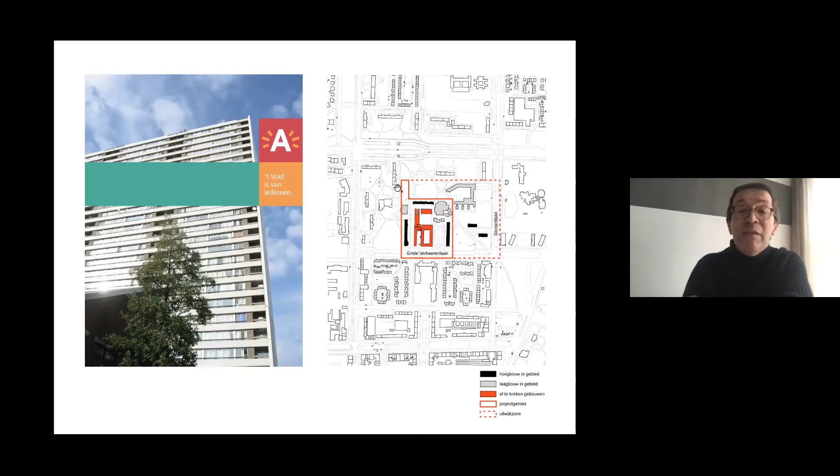And years later, in 2006, an open competition, an open oproep by the Vlaams Bouwmeester, was launched. They asked for teams of urban designers joined with architects.

Technum, and Bart van Gassen, the urban designer we worked with, judged that since much of the brief was in architectural terms, with very detailed specific briefs for buildings and programs, it would be necessary to make this urban design together with a few architects, enough to cope with all of the buildings that were needed. So we teamed up with Technum, and with de Vylder Vinck Taillieu and Tom Thijs architecten. We have fond memories of that collaboration.

What I will show in the presentation is the joint work that we did, the statements we made on the level of urban design, and then the three buildings we designed ourselves. But the work of our friends and partners will every now and then appear in the photographs.

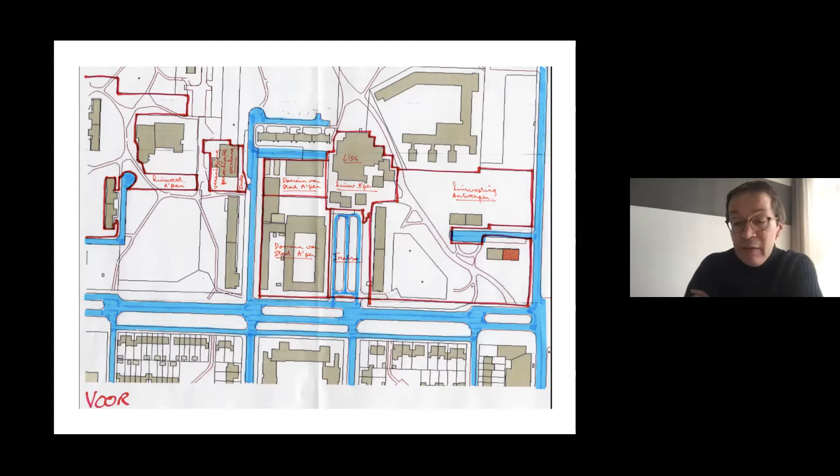So what we then thought was that the most important thing was to set the grid right, since the alignments were about the grid. We had to strengthen the grid and organize the additional buildings we had to design for, arranging them to this grid.

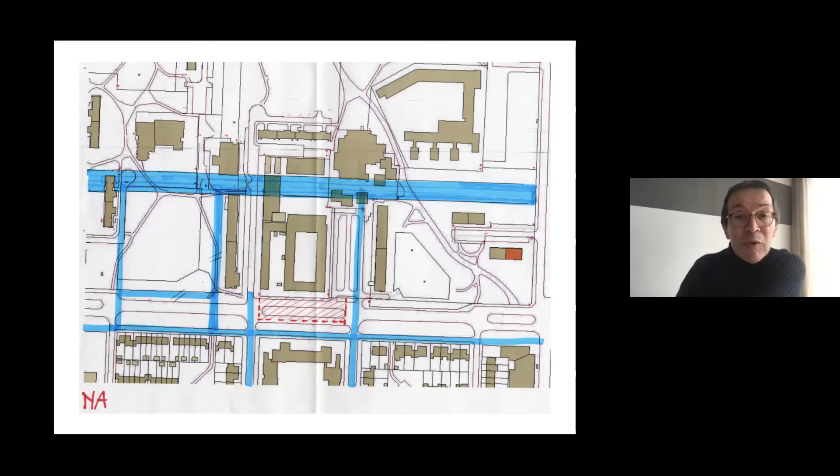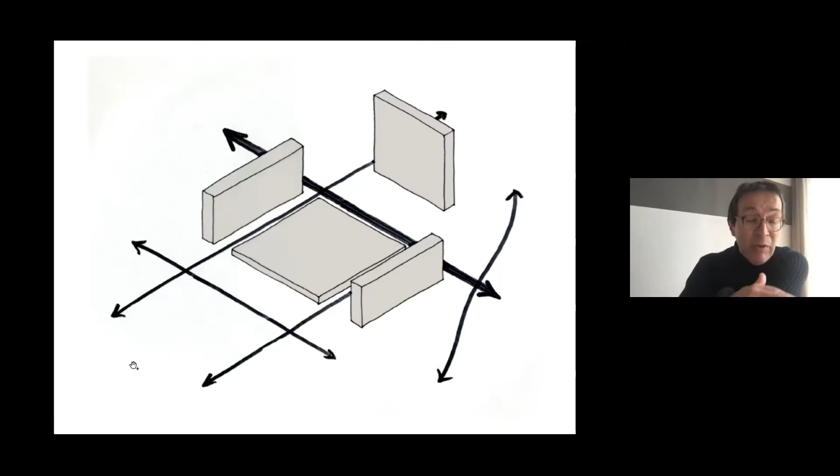So, a study drawing over here. This was very much the first idea. Instead of emphasizing the street that separates the low-rise from the high-rise, we thought that the emphasis should be more to the north, in between the three high-rise slabs, and that this would be the center of the plan, rather than the division between both of them, which then made it possible for the low-rise to cross the street and slide into the high-rise chamber.

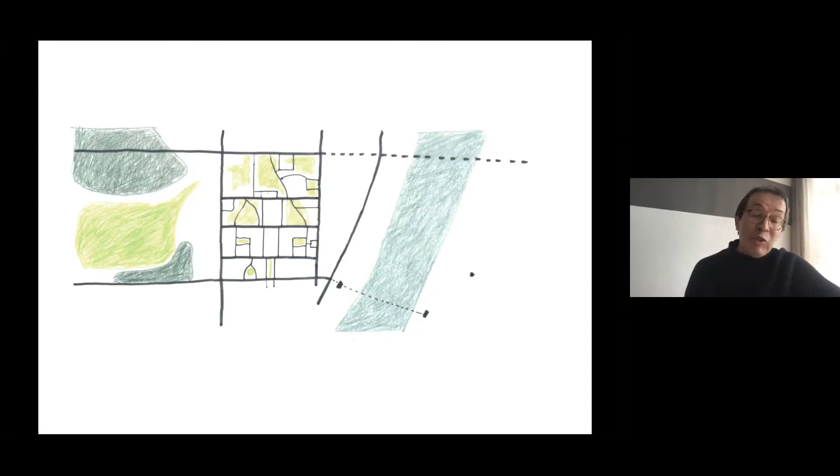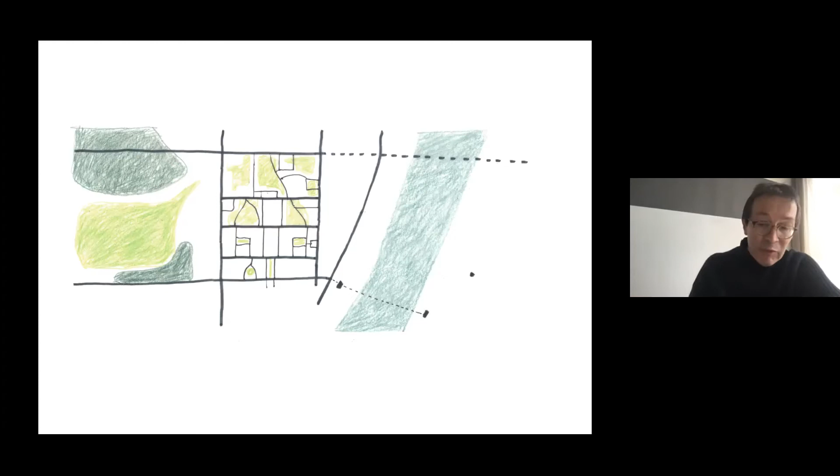So this is the new street that we integrated, and I think we could strengthen the overall design of this part of the left bank, which was actually a large-scale grid that could accommodate very different sorts of urban fabric, urban tissue. By doing this, we could make sure that the high-rise area and the other areas adjacent to it would evolve into an organic whole, one neighborhood, much more than segregated places where you would never dare go from one side of the street to the other, where these high-rise towers were, and where it was assumed different sorts of people would live. So this is the result of that operation.

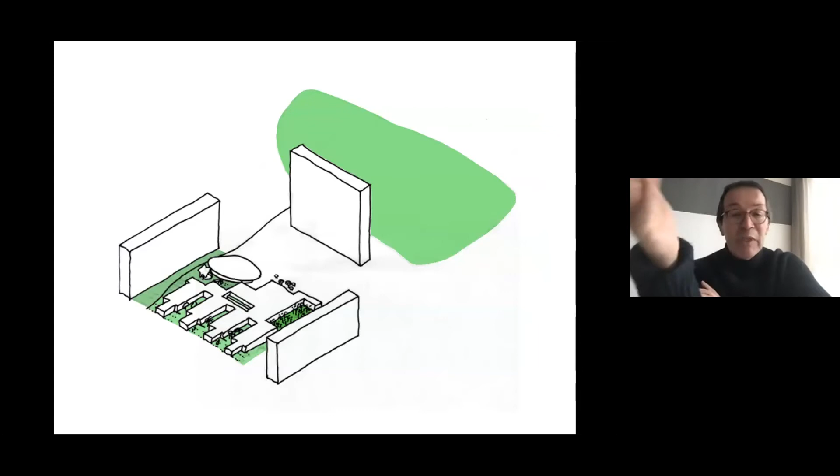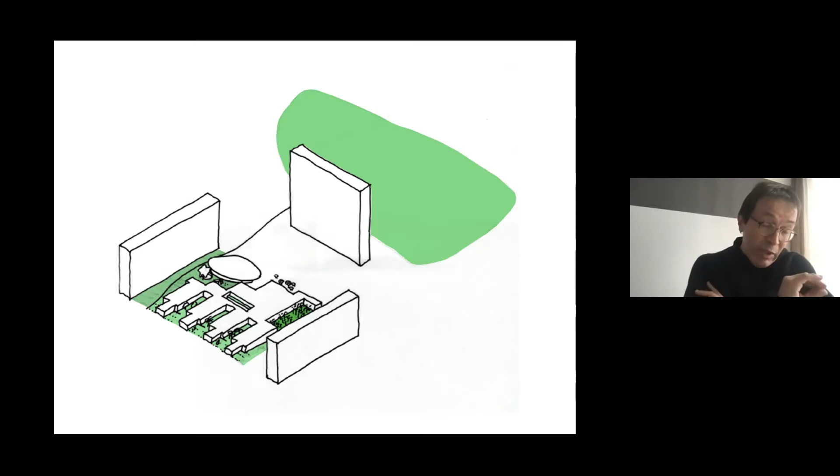So the area with the high-rises is characterized by very large park areas that we quite like. We were not making a plan against them, not making a plan against the high-rises. What it was much more about was adding on to them something that would be complementary.

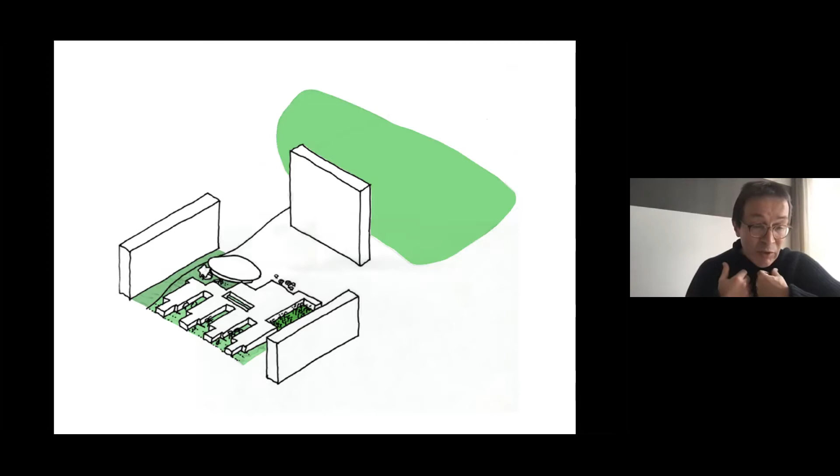There were already parks, but what was still missing were gardens. The difference, I would say, is that a garden is something much closer to your own living space - you could easily get out, make use of the garden, step in, step back, while the park will have a larger feel about it and be more public. So low-rise as the complement of the high-rise, gardens as the complement of the parks. That was the idea - two complementary sorts of environments, as the picture shows.

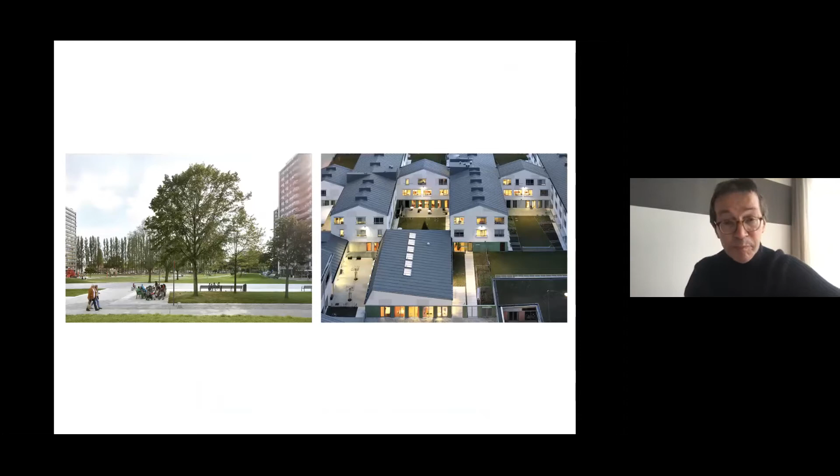There were many sorts of gardens. Here you can see them very shortly after completion, so still a bit bare, but small gardens that are immediately accessible from the rooms of the elderly care home, or from the other side of the fence of the kindergarten. And to the right-hand side, you see one of the gardens that is closed off.

That is a safe environment. Of course, there will be people with dementia here, and they would have a more safe courtyard over here.

Still another courtyard where other flats for assisted living and the kitchen and cafeteria of the elderly home join, and still other gardens where the kindergarten and those of the elderly home facility also meet and join gardens.

So this main street in the middle of the high-rises was meant to have all main addresses of the facilities. That is what this scheme makes clear.

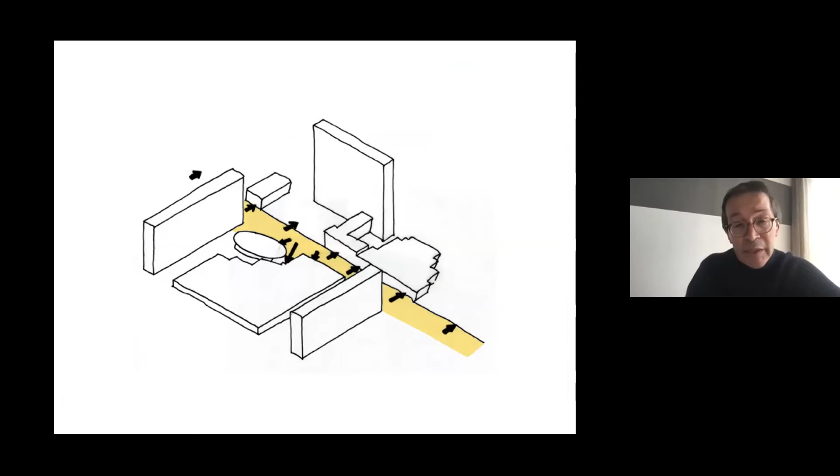So by building it, through a very organic interplay between the designers, actually very little was put on paper as agreements among the designers. We worked together and reacted to what we saw the other was doing.

But you could all of a sudden get something that felt like a street with echoes of other types of streets you would be acquainted with, in the middle of this high-rise environment - like a small stretch of colonnade in Jan and Inge's building, or a corner building in a high-rise area. Unforeseen, but they show that the area has evolved.

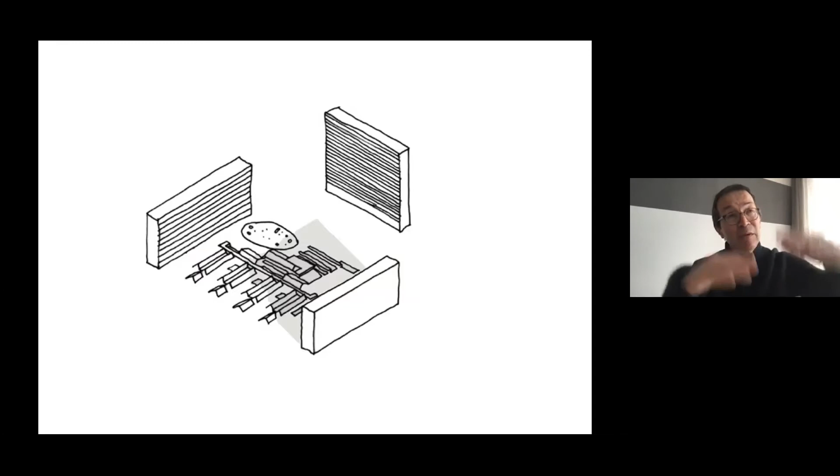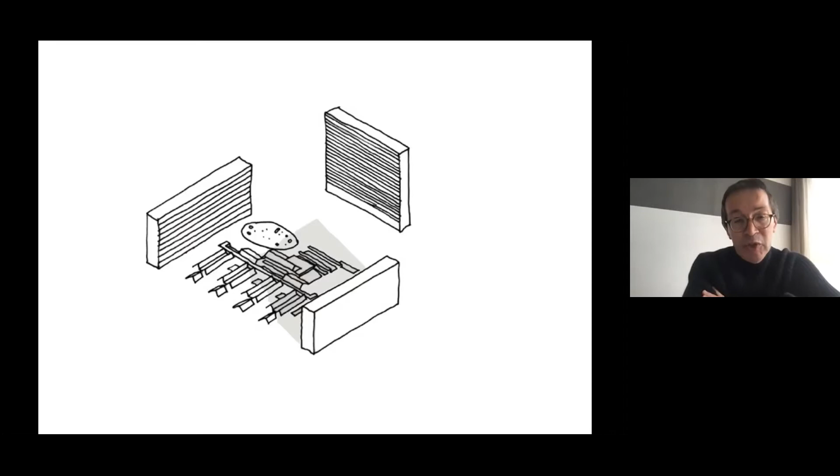Another early scheme showing how we thought about the relationship between the high rises and the low rise. The folded roofs, the sloping roofs were actually intentional, to give the high rises that looked upon it a roofscape to look upon, and also to break these large shadows that would fall down from the slabs. So they would interact with the varying heights of the roofs, and make a more gentle shadow on the ground.

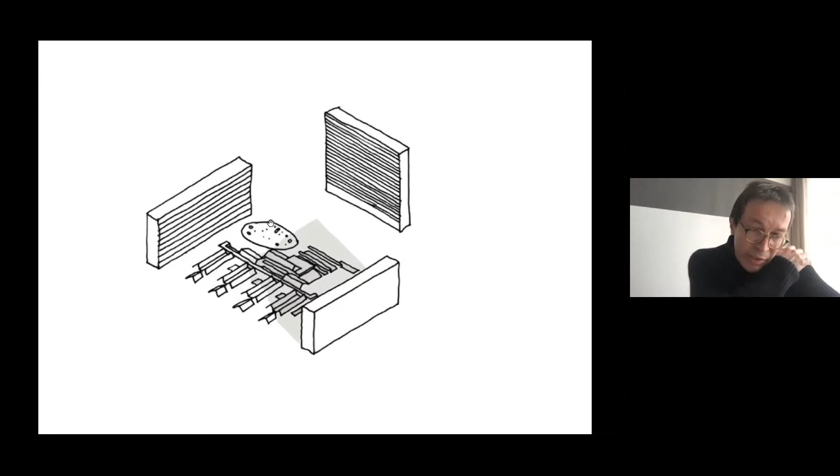So this pancake-like thing over here was the first shape we thought the kindergarten would be in, but instead of a mushroom, it eventually ended up like a flying carpet.

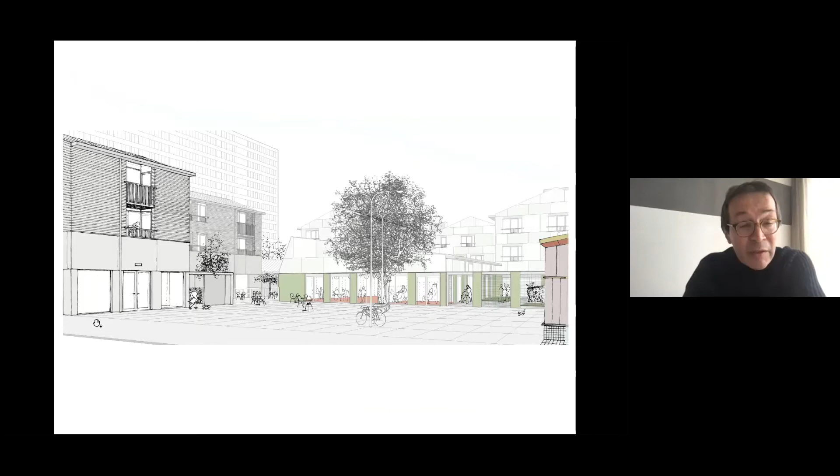A study of the square, a square that is on this main street that I explained. Why the square? Because on a limited stretch of street length, quite a number of addresses had to be realized. So at least 2 for the building with the service flats, the entrance of the kindergarten just appearing here in the corner, going like this, and then the main entrance and a number of secondary entrances for the elderly home care facility.

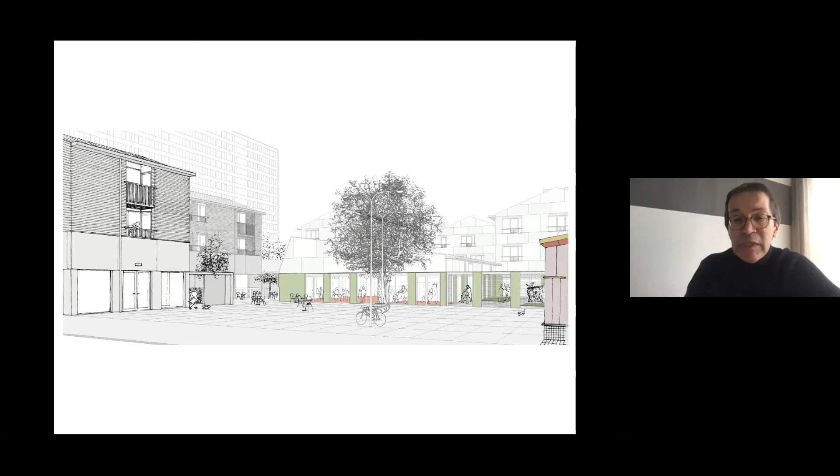The cafeteria, of course, and the main entrance here on the square, that then housed a number of additional addresses, a door for hairdresser, ergotherapy, pedicure, things like that, manicure. Within, in the end of this courtyard, the entrance towards the housing facilities.

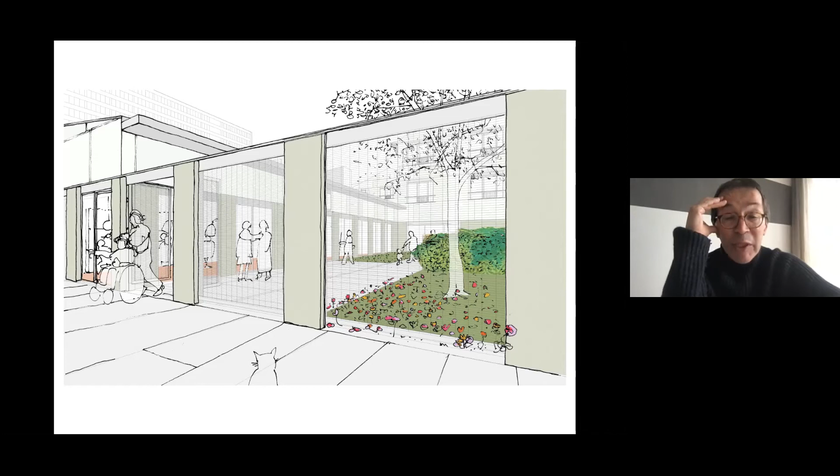So this is a detail, of course, of how this building was designed, but it explains what the idea about the elderly home care facility really was. We thought that the most private rooms of it should be more adjacent to the low-rise garden city, and the more public parts of it that would also have visitors from outside the facility, people who would live, for instance, in another street or in one of the high-rise flats, could also make use of them, and therefore we wanted to have them closer by on the square and on the main street.

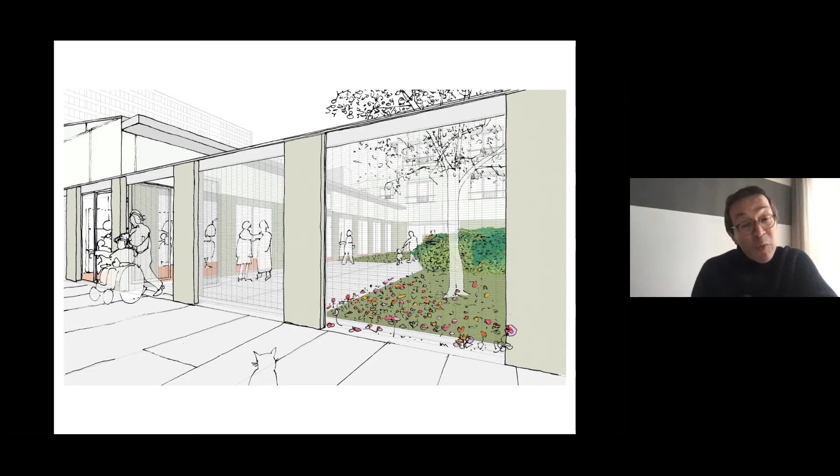So in more abstract language, there's a gradient from public to private throughout this building.

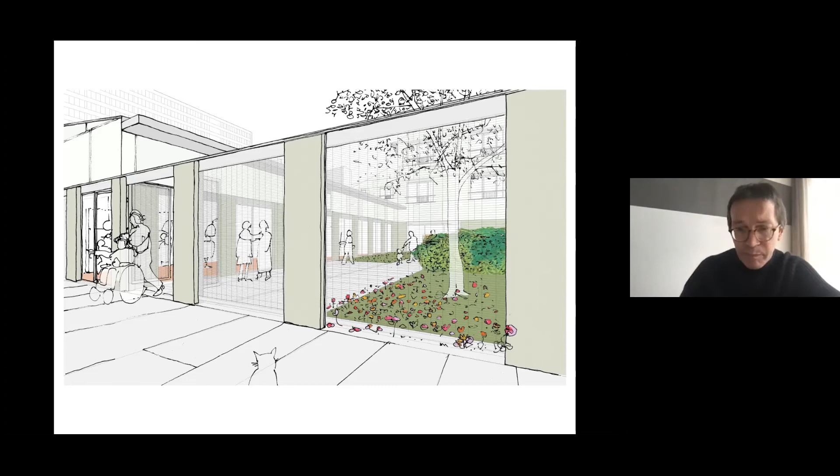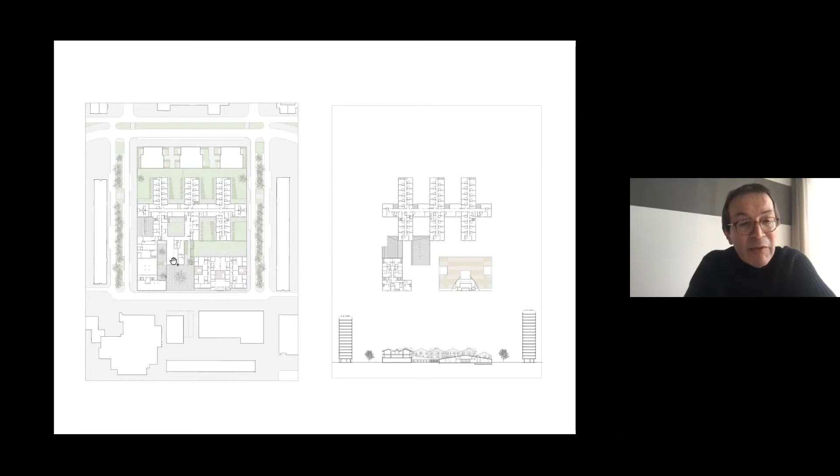Entrance for the kindergarten is right here. And entrance for the flats is here. Entrance for the shop area on one side is here. The grocer is right here, you remember that. Cafeteria, and then this strip of other facilities along that courtyard, adjacent to this other courtyard.

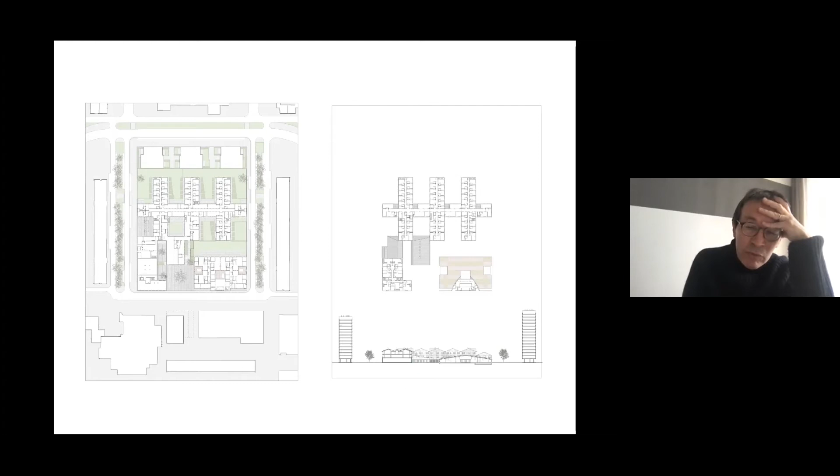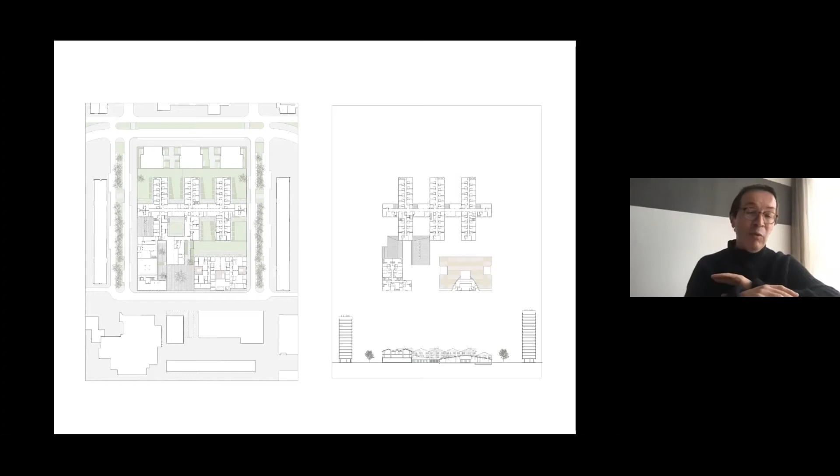Well, you can see the section, high rises with a low rise in between. And what is suggested in the section, and not just in the section, I think, is that actually both the adult buildings for the elderly and the more childlike building for the kindergarten have actually the same concept. It's a gabled roof perpendicular to the main street, albeit that proportions of the one for the kids are a bit out of hand. So it's less controlled, less, well, it's just flat.

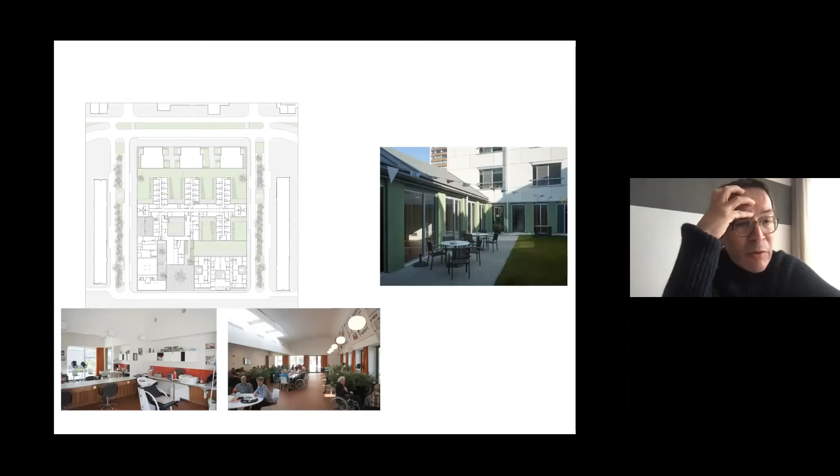So a set of slides to take you from the square to the other side of the elderly care home. Photographs by Marius Grootveld, showing the hairdresser, the cafeteria below. And then after that, you reach this closed off courtyard that I spoke of.

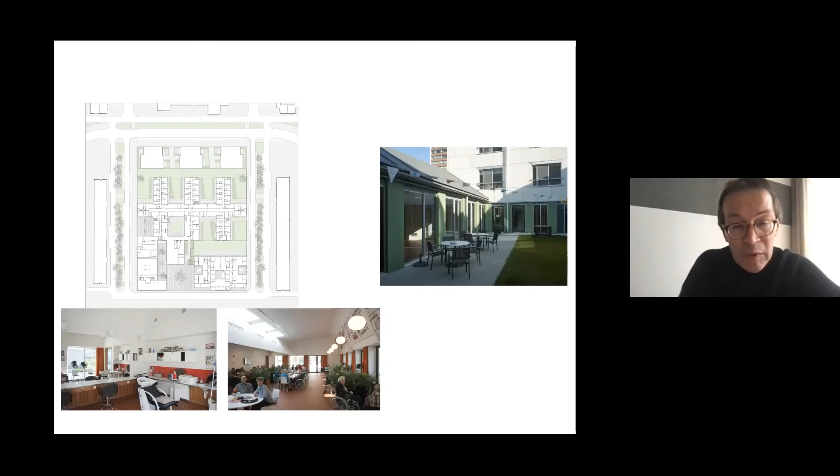And then you could still walk on, either take the stair or the elevator to the stories above, or go right ahead on the ground floor. And then you would come in this space, which consists of a series of living rooms.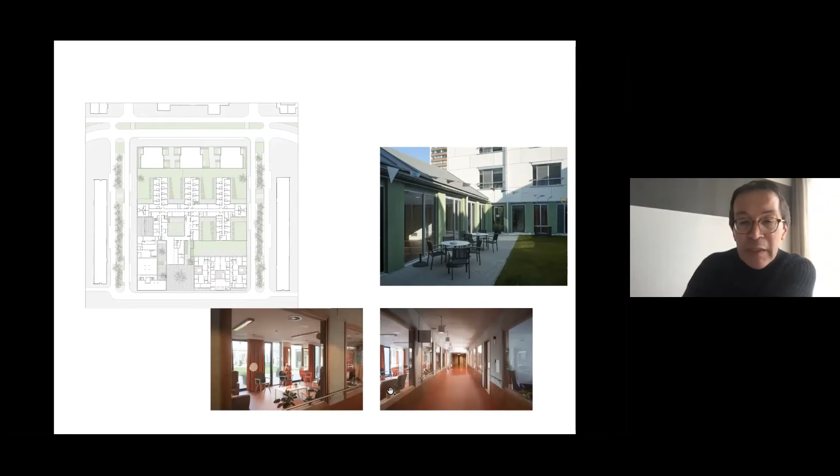There's a room for smokers, quite peculiar, we thought, but smokers have the right to have a room in the elderly care facility. This would be one of the arteries where staff would move through.

And then eventually on the floor above, first floor, you would have very much the same concept with the corridor in the middle, but much more open. The areas for eating together are more open to the corridor than they are on the lower floor.

They have this window that you can see here is the same as this one. They have an outdoor space nearby. And these are the areas where people can meet in larger groups to share some of the day together.

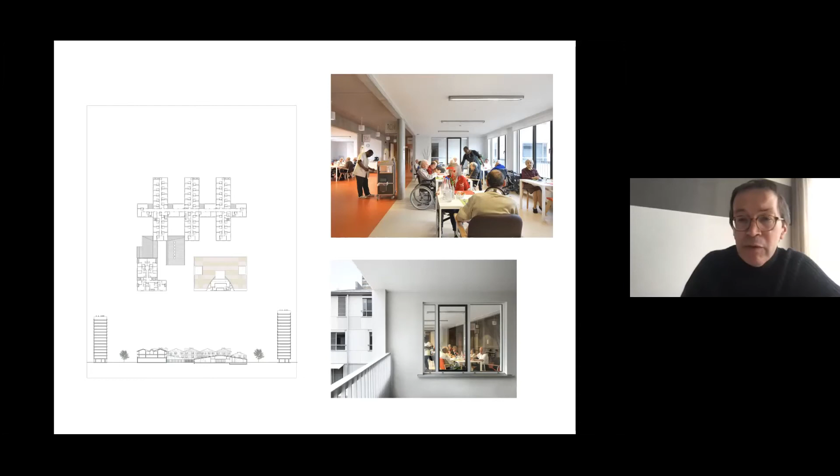Again, same thing on the second floor, where you can see that the plan again changed with shorter wings. Another position of the terraces as to the living room areas, like this.

And so what I hope to make clear from this little promenade is that even if the building is very regular in its plan and the way it has been built, you are always perfectly aware where you are, whether you are on ground floor, first floor, second floor, the relationships to the outside and to the main rooms, to the main components of the building itself are different. So you are not going to be, by accident, on the wrong floor. You will recognize where you are.

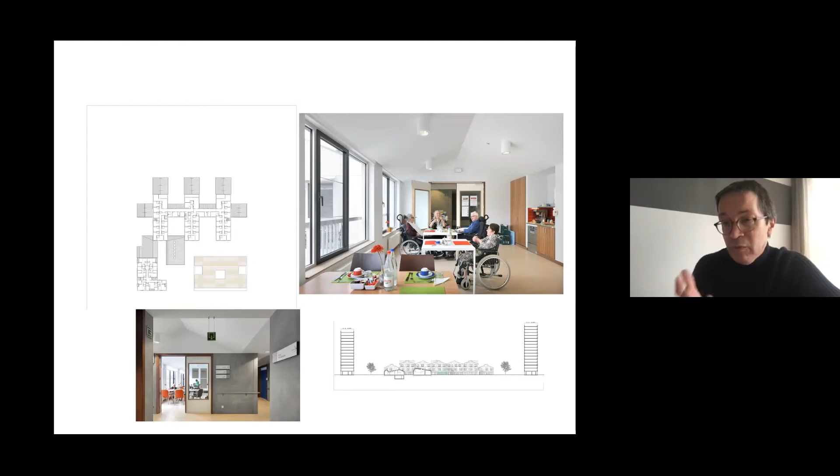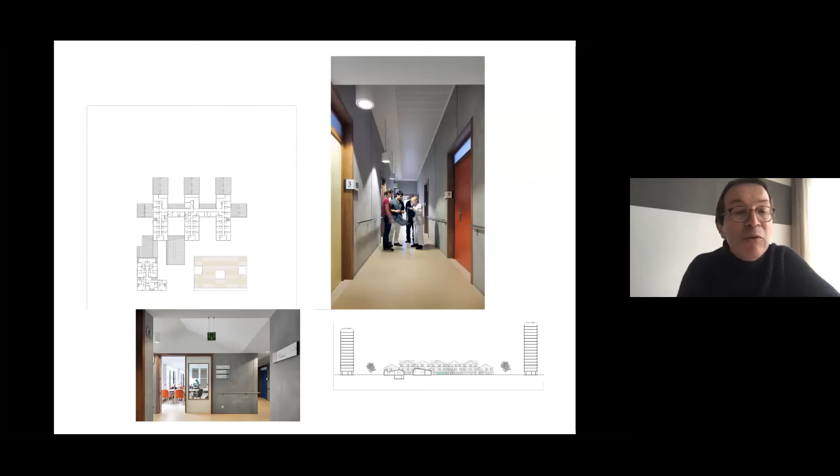And then finally, one of the corridors where the rooms are. So we didn't want to think of this building as if the private room, which is of course a small room with a bathroom etc. all in there, that would be your home. No, actually your home is the whole building. These dining areas, living rooms on the corridor, on the central corridor, are also your home. The cafeteria in front is also your home. This central courtyard is all your home.

And that is how this gradient works for you as an inhabitant. You can choose where you spend an hour of your day in privacy, in your own room, or together with others, or on the outside in one of the gardens, on one of the terraces. Yes, so that is what this gradient really is about as a daily experience for inhabitants.

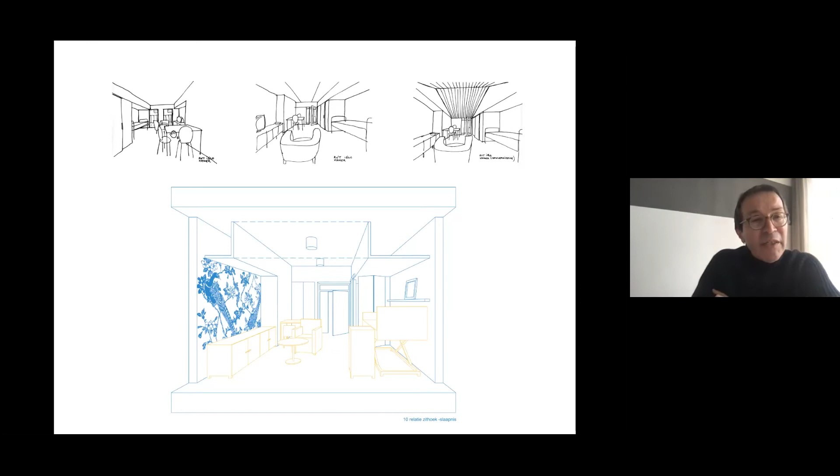So the 3 sketches above show that rooms on each of the 3 floors feel different. To the left-hand side, you have French windows. You could just step outside because you have a garden in front of you. You cannot do that on the first floor, of course, that wouldn't make sense. It would be creating the wrong idea if you would have French windows there.

So windows, they have a balustrade, 70 centimeters high or something like that, so you can easily look down when you are in a chair. And then in the ones above, you feel that you are below the roof, that you are in a sort of attic situation because you feel the hovering of the roof above you.

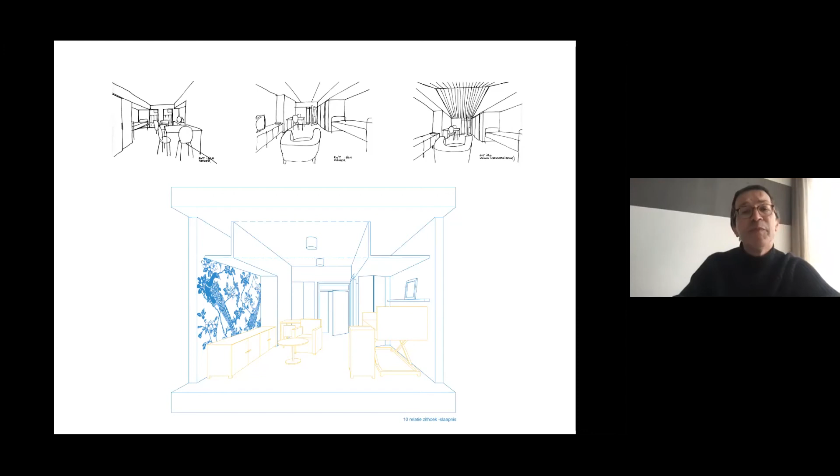So all this is, of course, to make sure that people who can suffer from a faulty memory or something like that really recognize the places where they are supposed to be as their own, and that they don't all of a sudden end up in a different one.

And what you can see here is how the repetitive rooms were made specific by color schemes, by a combination of three surfaces that each have their colors, all of them in different combinations, and then you would have a unique combination for each of them. Then adding on to that, you differentiate ground floor, first floor, second floor, and we think that this repetitive design still makes for a lot of individuality inside.

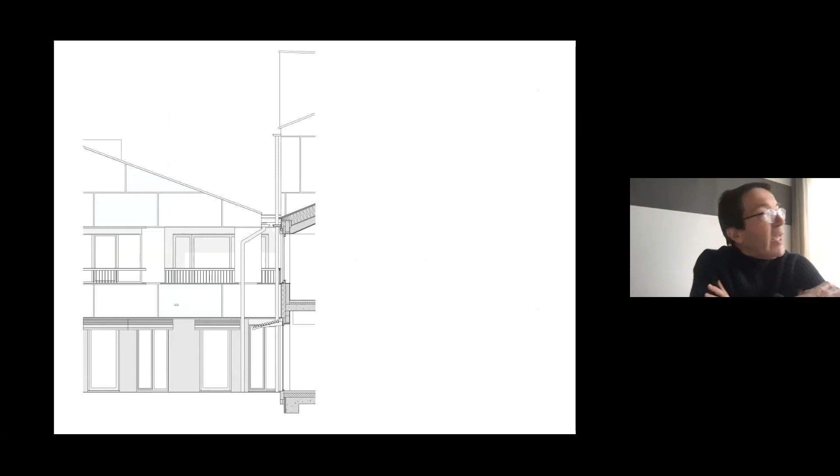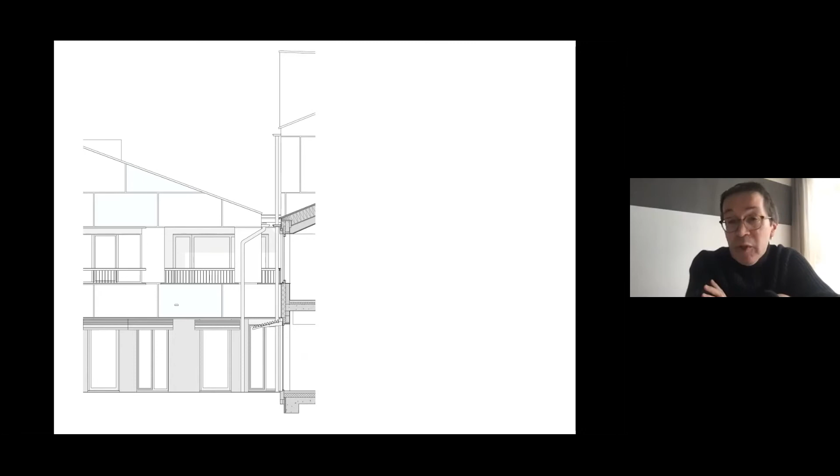Maybe a few words on this detailing of the facade of it. It's actually a facade, a plastered facade with plaster on insulation boards immediately. So something that is usually considered as a very cheap way. Cheap in all senses of the word, a vulgar, ordinary way of doing things.

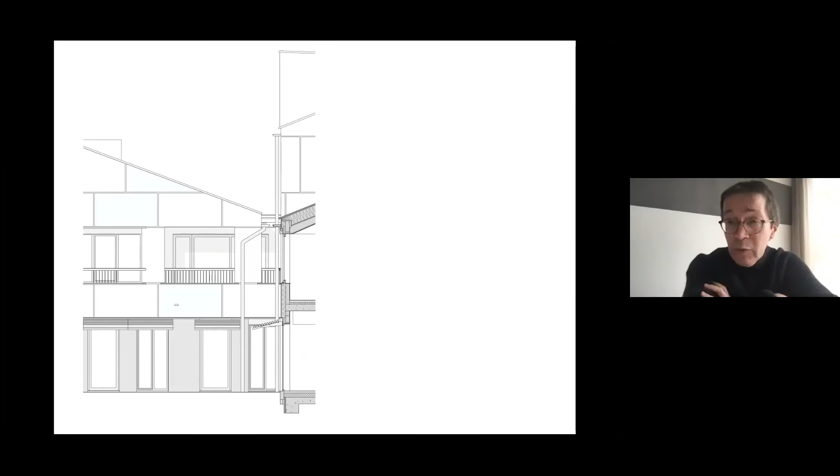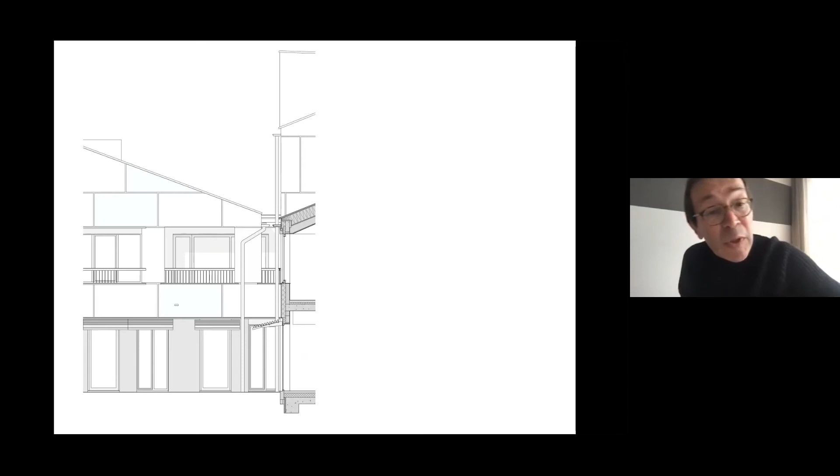But we thought that we could learn from some of the 19th century buildings that we have. Well, I can see some when I look outside the window here. Plastered facades in the late 19th century, early 20th century were of course also subdivided by joints to make them look like buildings that were built in large pieces of tailored stone. So, and we thought, since we are thinking here of large panels, we can subdivide our plastered surface, our insulation boards, also with joints, much larger than they would be in a stone facade.

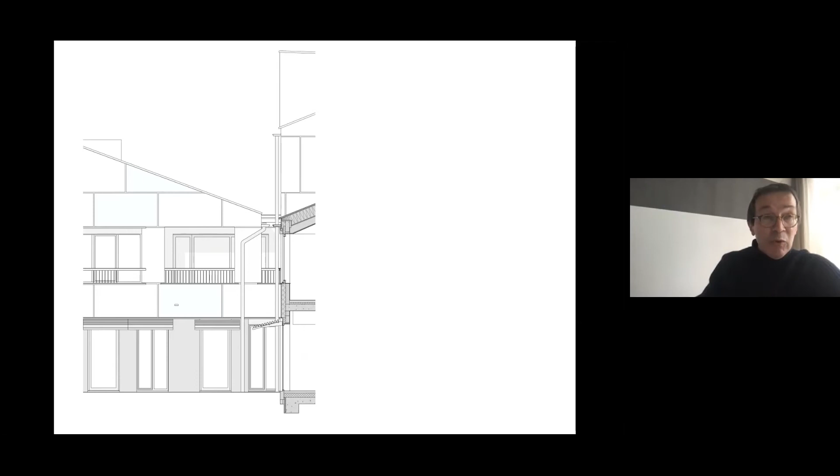So it's not similar to a 19th century facade, but it's something that makes you wonder whether you see paneling or whether you see, it's a sort of gentle lie that you expect to receive from a plastered facade.

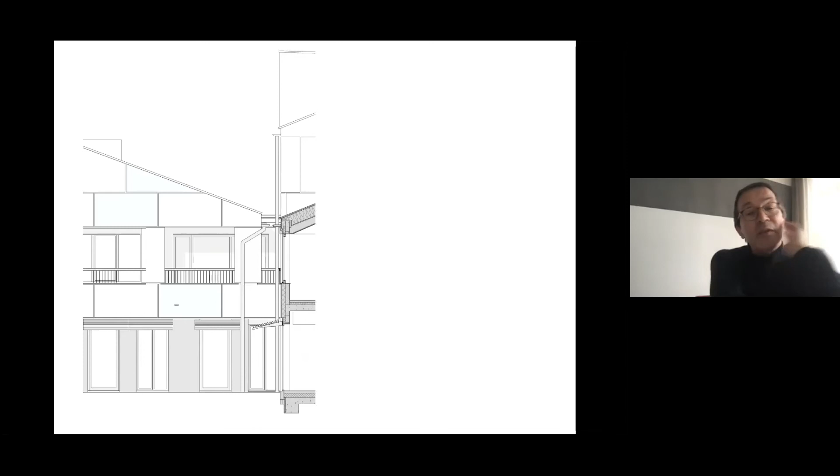And as you can see, we chose 5 colors because the color had to be added on after the plaster was done. And we numbered all these cases 1, 2, 3, 4, or 5. And since there is a lot of irregularity, we ended up with a random facade that was done actually quite easily.

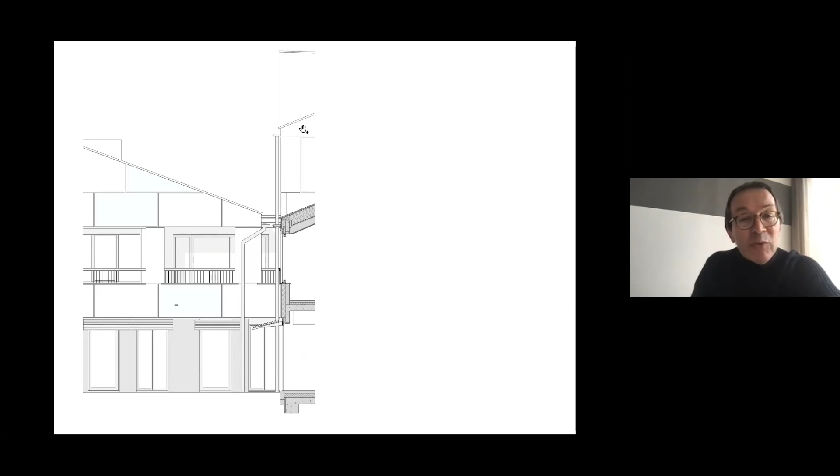So all these sloped roofs next to each other should allow for a space in between, which is for gutters to pass by. And then in this loggia, they provide for a nice detail, as you can see. So you have in a covered loggia all of a sudden a small part that is on the outside. It's actually the logic of how to build this thing and how to deal with the module of it.

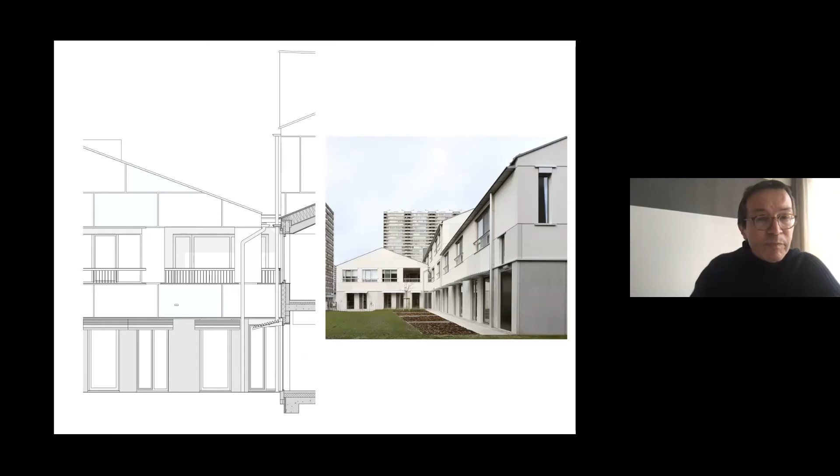Yes, 2 buildings together. Here, I will say a few words on how we treated the wish for having large-scale materials in this building, in the kindergarten. That large-scale material is cement board.

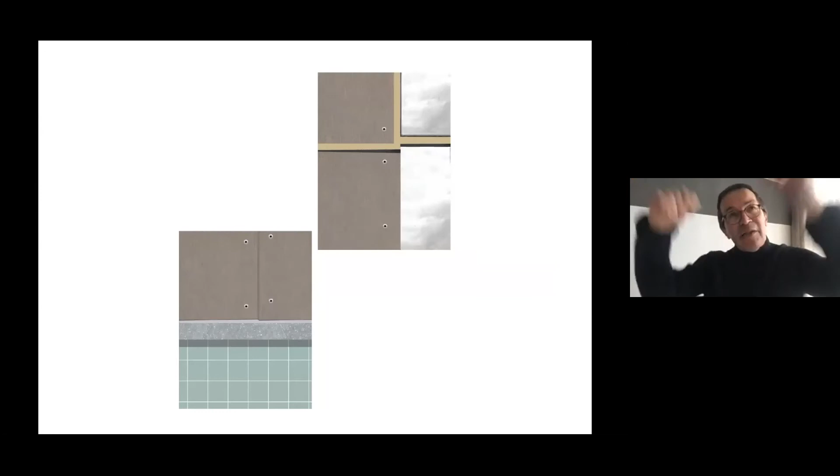We had larger panels below an aluminum horizon that is suggested here, and we had smaller dimensions above, so to make the building lighter as it goes up, and also to stress the importance of that horizon.

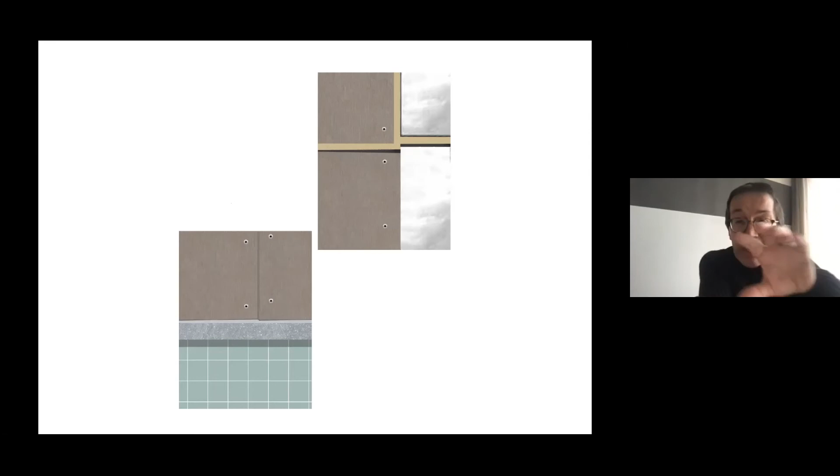Furthermore, that was a precise requirement from the client. He wanted that if one of the panels would break, which is of course always possible, he should be able to remove one and replace it without having to unmount the full facade. It's evident, of course, so that's why you see the visible screwing.

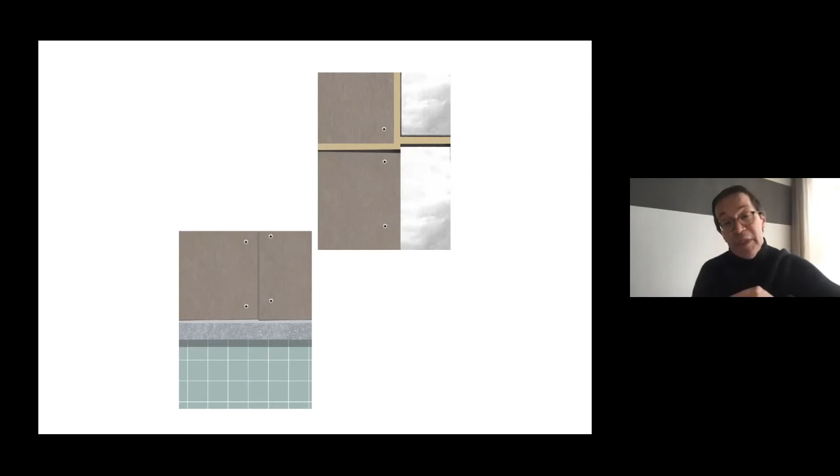And then we thought that they should be slightly on different levels, so we thought of a wrongly buttoned jacket. That was the idea here.

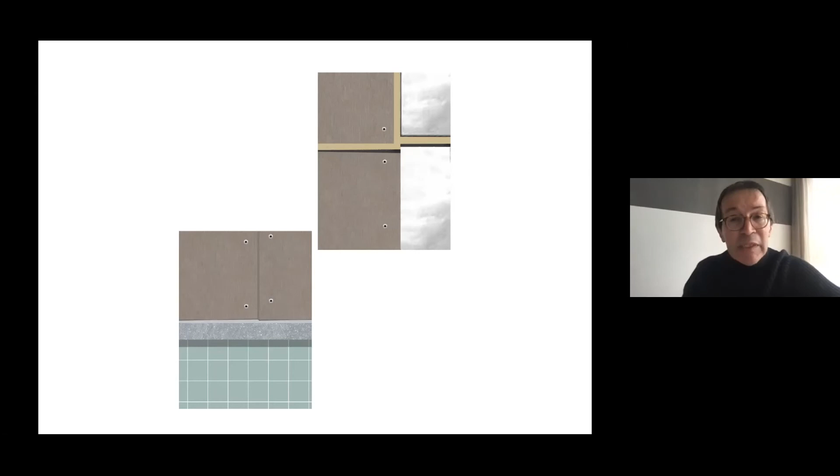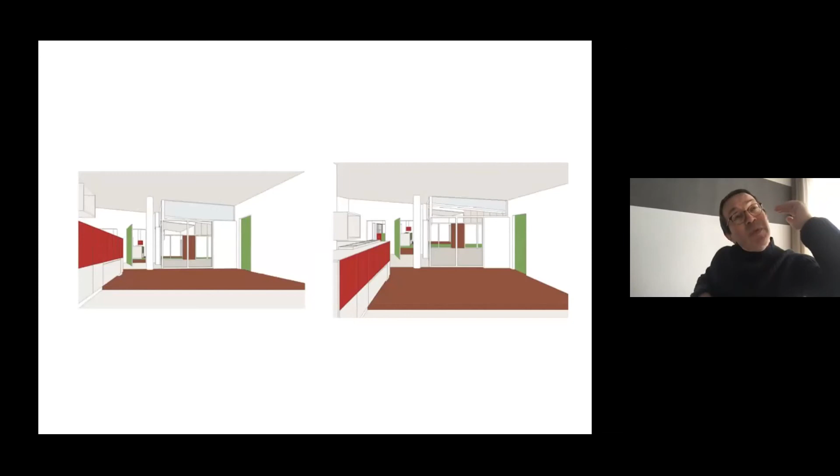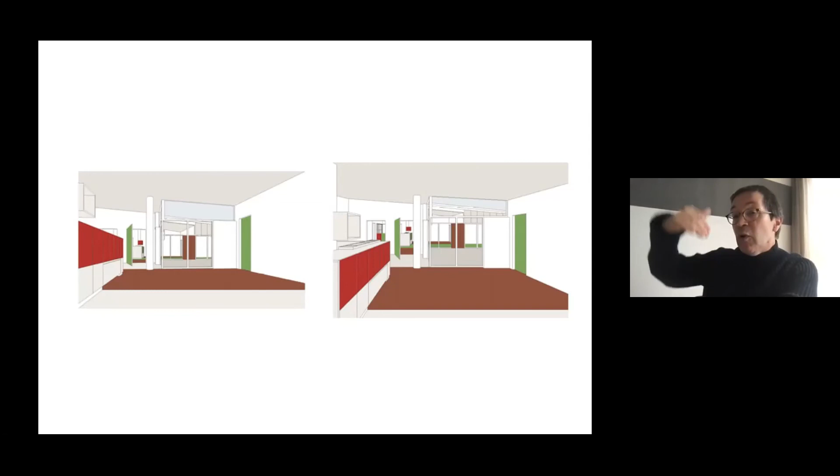The horizon was important because this is a building where kids, if they are there for maybe 2 or 3 years, would really grow dramatically in size. So if the building would have, both on the outside and the inside, a sort of insistent line, a horizon where you can see that you are getting closer or further off, that would make for an experience for kids, probably an unconscious one, but nevertheless.

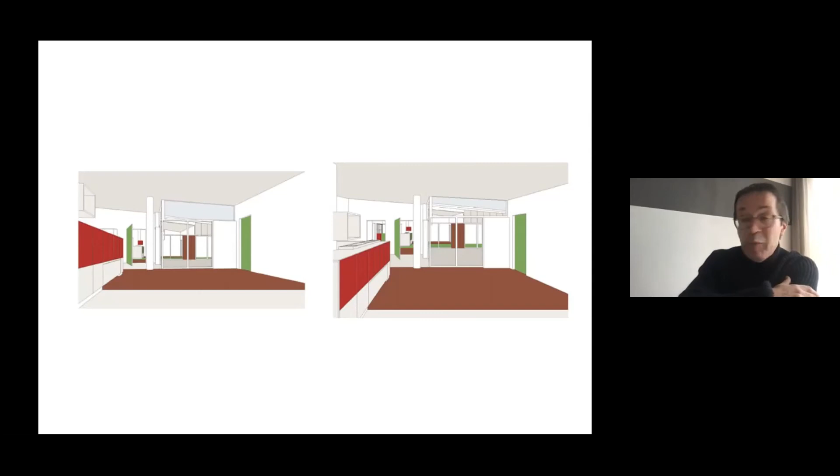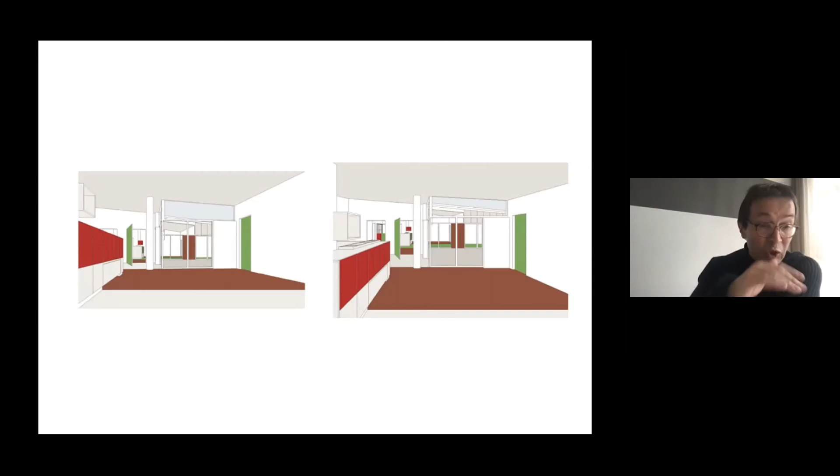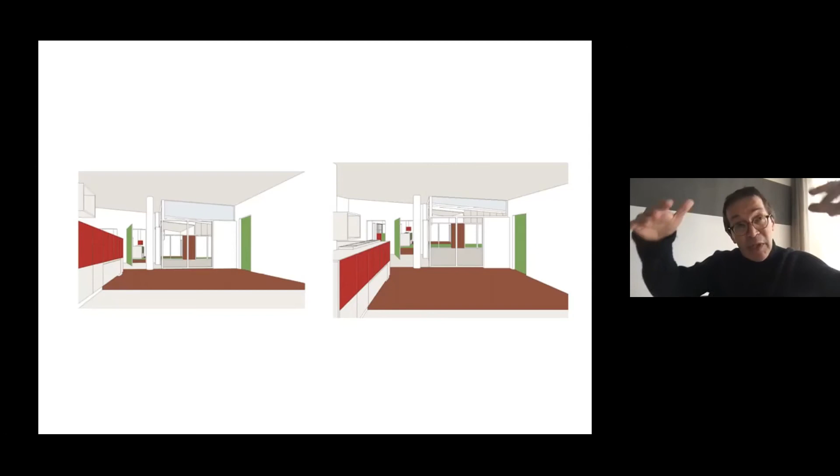So that's why we studied the units on the inside, both from the perspective of one of the caretakers, an adult, but also from the aspect of the kids, who would have their eye level much lower than the adults would have. And so the space, and the ceiling that would slightly go up, would be more dramatic for them, more clearly felt.

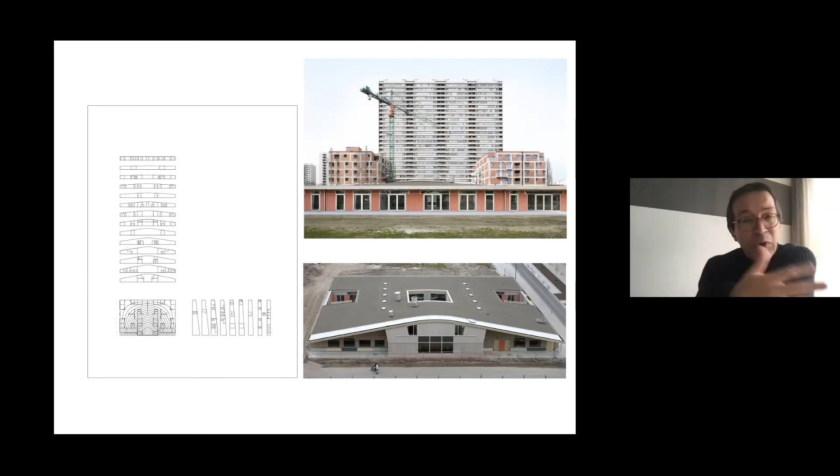Because that is what happens if you keep 3 sides of the rectangle horizontal, and the 4th side has a gabled roof with a high point in the middle. Well, then you get this sort of... I don't remember the exact word for it, but a hyperbolic, parabolic shape, something like that - think of Gaudí or something like that, and this is what you get.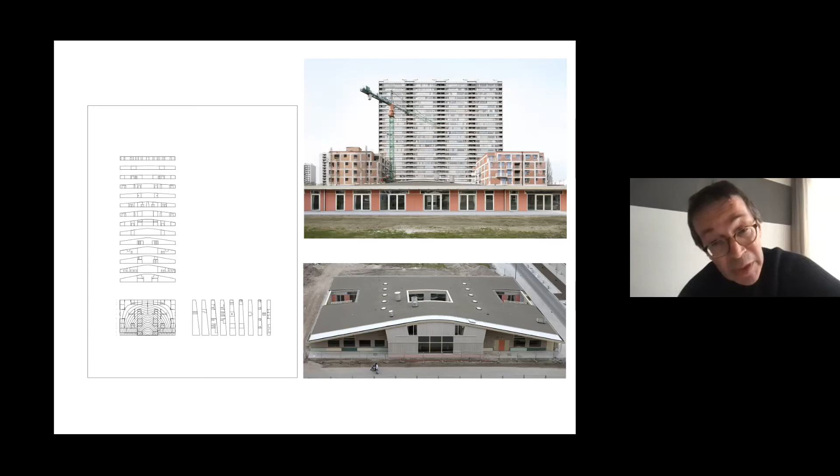And it's actually quite easy to build if you have a strict plan with a grid in it. Each of the gradations of this roof that goes up is fairly easy to make, so it was actually not a big deal to do.

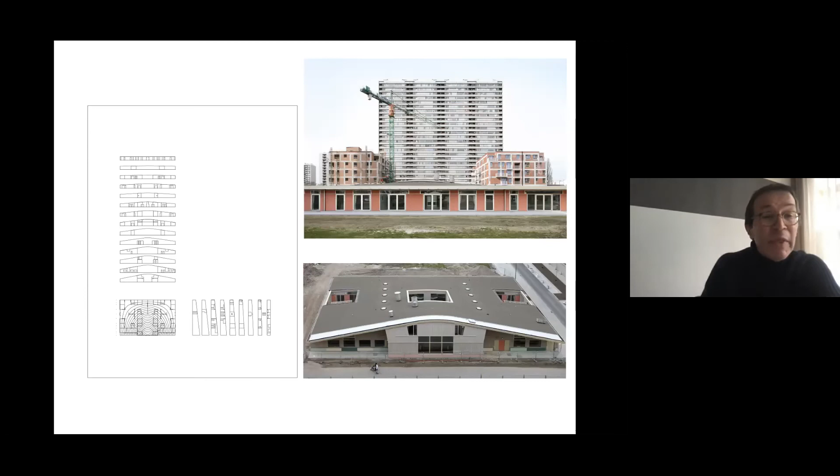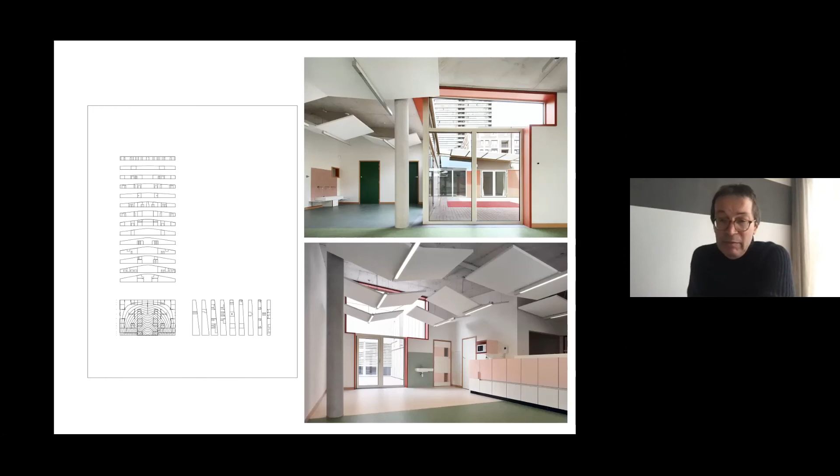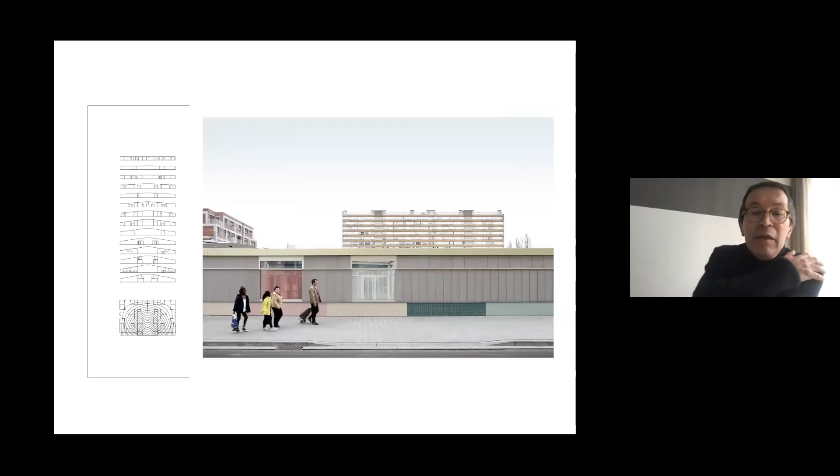The outside street scene again, where the constructional system is of course not visible, since everything is clad, but it is suggested by the sequence of colors in the plinth. Each of these different colors corresponds to one bay in the structural concept of the building.

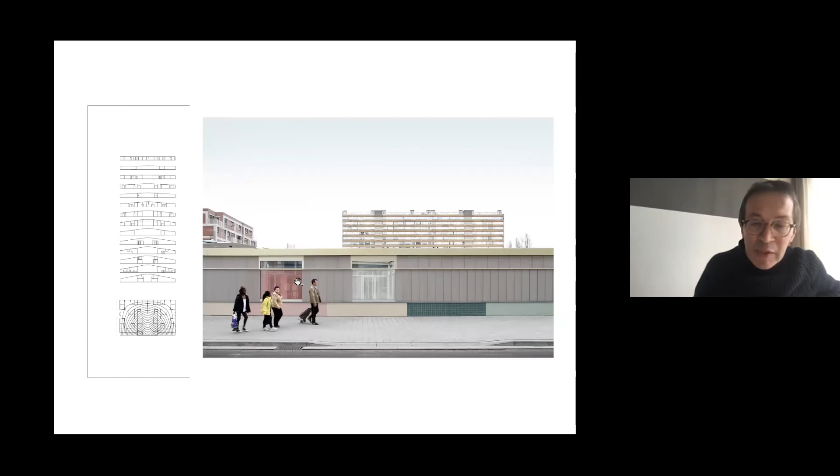The window that you see here with the pink print on it is a courtyard, and this courtyard was photographed by Harry Gruyaert at a later time than Filip Dujardin did, who came there only after completion of the building.

There is an outside garden there which has plants and grass. We wanted to make very clear that this was stony, and that is why the grass carpet here is red, artificial.

More red on the inside, and combinations of details. It's structurally a very severe building, but it has lots of small interior details that are required, mostly by the brief, to meet the needs of either the caretakers or the kids themselves.

And well, there was of course an acoustic requirement because these kids can yell. So what we thought was that we would have baffles that would work on both sides, the lower side and the upper side, to both do their job.